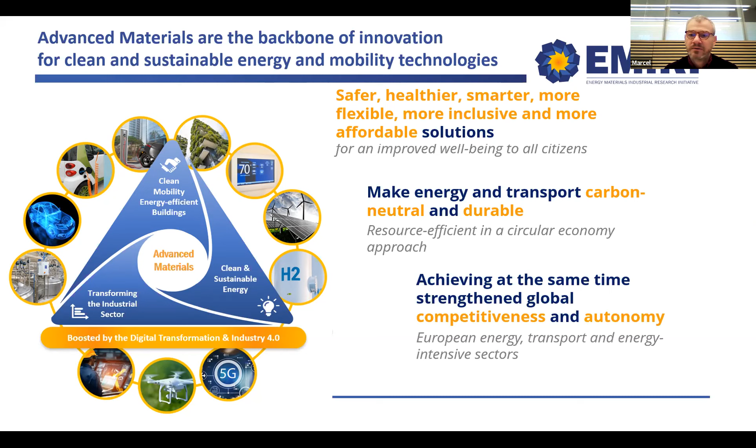I'd say a couple of elements: we are industry driven. There's a majority of research organizations, but they all understand we are here defending research and development or innovation that comes at a moderate to high technology readiness level, I'd say from 3, 4 up to 7 when it comes to EU support. There are other clubs pushing for the more fundamental part, with whom we work, but we try to focus on what we do best, which is industry-driven and industry-supportive research. We try to fit the EU strategy as much as possible, so we try to shape and implement their policies.

For example, EMIRI is one of the leading forces behind the Advanced Materials Initiative 2030 of the Commission, which is there to shape the vision for 2030. So this is typically what we do. On innovation ecosystem, we collaborate with public institutions to make sure that the priorities funded by the European Commission and the member states are the priorities that you guys have. We are there to defend your priorities and to make sure that the money made available is money you can use.

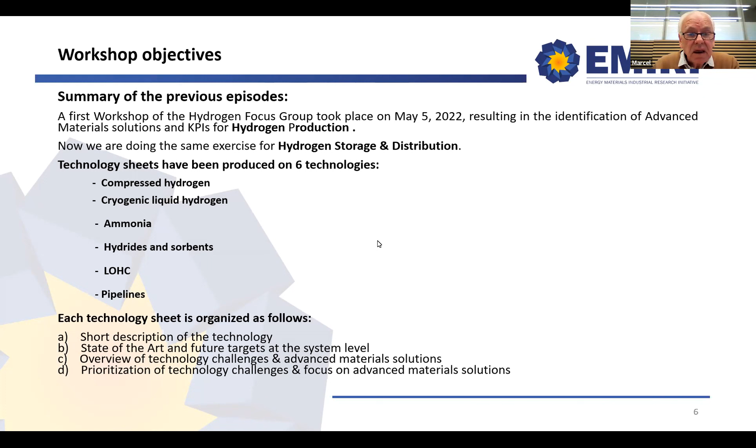Here you see an example of that prioritization work. On the left-hand side, for compressed hydrogen, the different technology challenges: reduce hydrogen embrittlement, increase the storage efficiency, etc. Those challenges have been voted within the focus group, and weight factors have been given to different challenges - you see them from 100 down to 20. And the first series of advanced material solutions has been proposed.

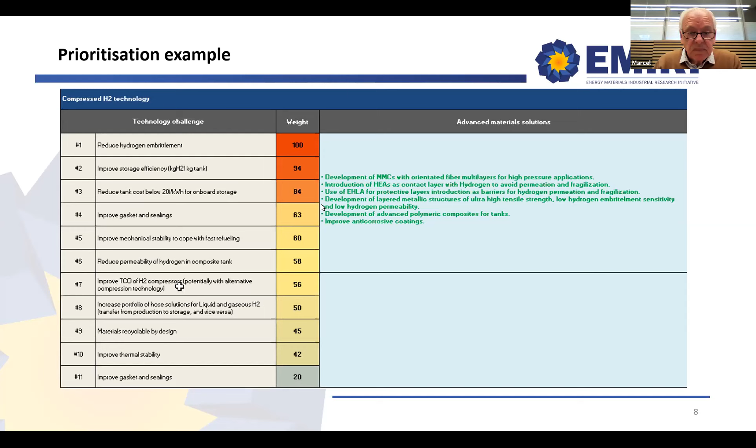So what are we going to do today? In the morning session, open to all of you, we will have experts from different European RTOs and companies give us a technology update on those 6 different technologies. In the afternoon session, restricted to EMIRI members, we will have a workshop aiming to identify the most promising advanced material solutions, KPIs, for those technologies, and a review of the technologies. We will, for those technology sheets, first identify per technology the advanced material KPIs most impactful for the system KPIs, and then select a top 10 of these advanced material KPIs.

We will try to put values on those KPIs - state of the art and future targets, short-term and mid-term. The final purpose being to build a qualitative matrix showing the relationship and impact between the advanced material KPIs and the system KPIs, and that's what we call a heat map.

This is an example of that heat map. You see the different KPIs on advanced materials and their relationship with system KPIs.

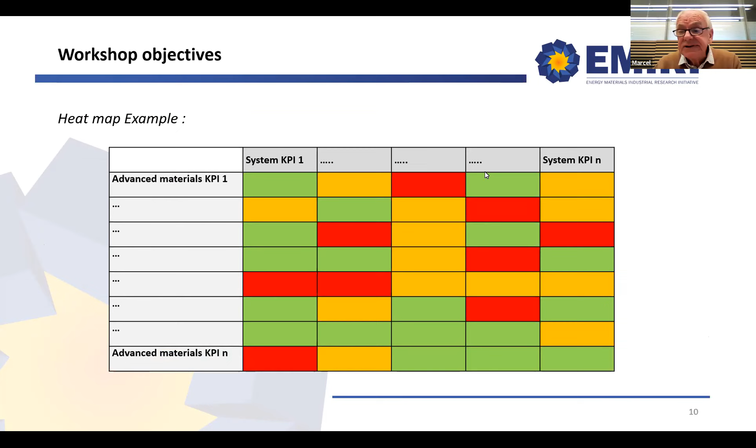After that, the next steps, we will update those technology sheets with the selected key advanced material KPIs, including the values, and we will try to make a heat map with the links between advanced material and system KPIs.

This is the program for today. We will have in the morning session an update on EMIRI. Yeah, that's what we're doing now.

The next item will be a presentation on compressed hydrogen storage, and I will do that myself as an introduction. Then we will have a presentation on liquid hydrogen storage by Dr. Davide Duri from CEA. We will have next a presentation on ammonia

by Professor Earl Goetheer from TNO, followed by a short coffee break to continue by 11:30 with a presentation by Dr. Felix Heubner from Fraunhofer on hydrides and sorbents.

On liquid organic hydrogen carriers. And finally, with Professor Depover from the University of Ghent, a presentation on pipelines. Karim, member of our group, will try to make a short wrap-up at the end of the morning session. That's for the morning part.

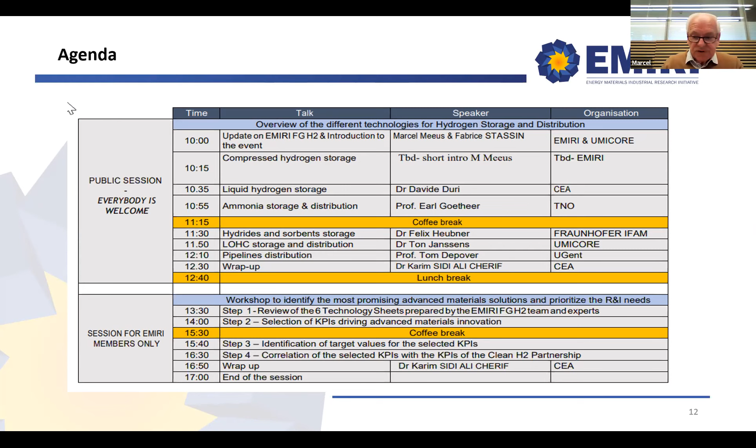And then, again, if time allows for it, a first version of the heat map. So these are the presenters: myself, Davide Duri, Earl Goetheer, Felix Heubner, Ton Janssens, and Depover.

A few words on our focus group. We are about 80 members with good industrial presence. You see here the names: Solvay, UMICORE, Engie, etc.

And a series of well-known research and technology organizations. So we are about 80 members.

The focus group is led by Fabrice Stassin, with as co-leader Karim Sidi Ali Cherif, and I'm doing a little bit of technical work, the technical advisor to those two gentlemen.

Karim did production in May. Fuel cells is announced for January by Fabrice, and today we are doing the storage thing.

The purpose is to define smart key performance indicators, smart meaning specific ones, measurable ones, attainable ones, so realistic ones, relevant ones, and time-based ones. And that's what we will do in the afternoon.

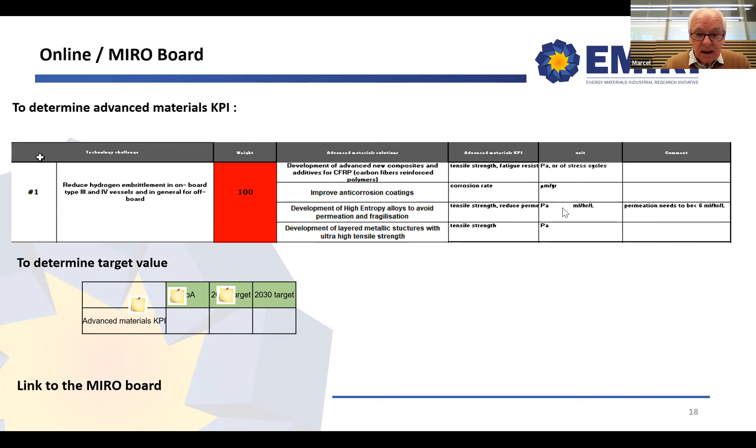But the word will be with you in the afternoon to complete the full picture. Here again, the heat map example, and that was the introduction. Thank you.

Are there any questions on this introduction? If not, we go to the presentations.

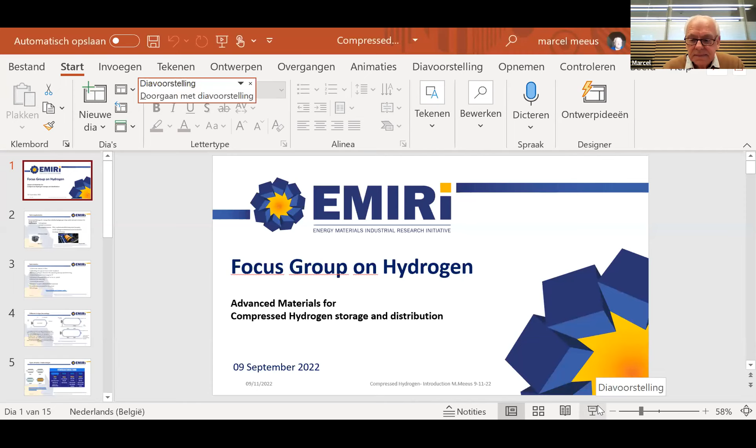So I'm the one to start the series of presentations, and I will give you not an academic introduction, but a more practical introduction on compressed hydrogen storage and distribution by focusing on the tank materials.

So what are the tank requirements in compressed hydrogen storage? It is a technology whereby hydrogen gas is kept under pressure to increase the storage density. And what are the specific requirements to compressed tank storage?

That is, and importantly, the leak tightness of the system. The system has to be compact in construction, needs to have an adequate weight for the application, and more importantly, a high fatigue resistance, meaning that the tank has to be filled, emptied, refilled many times, 10,000, 11,000 times. So we're talking about the number of cycles in the operation of the tank.

And then it will come as a red line through the presentation, bringing solutions for the risk of hydrogen embrittlement. They need to be considered in the design of the tank.

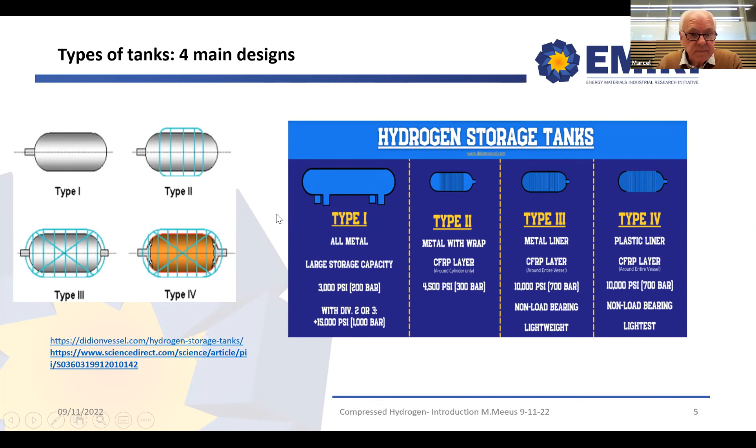In a little bit more detail, type 1 are all metal vessels that store only about 1% of hydrogen at 200, 300 bar. Type 2 is a metal hoop-wrapped composite cylinder, weighing less than type 1. As said before, types 1 and 2 vessels are unsuitable for vehicle applications due to their lower hydrogen storage density, heavier weight, and, because we are talking about metal containers, because of the risk for hydrogen embrittlement.

Type 3 and 4 are the ones for integration in fuel cell cars. Type 3 comprises the fully wrapped composite cylinder with a metal liner, and that metal liner is mostly made of aluminum alloys. Type 4 is the same wrapped composite cylinder, but this time with a plastic liner. That plastic liner is typically high-density polyethylene, acting as the hydrogen permeation barrier. The composite overwrap serves as the load-bearing structure and is typically made of carbon fiber or glass fiber composite, in an epoxy matrix.

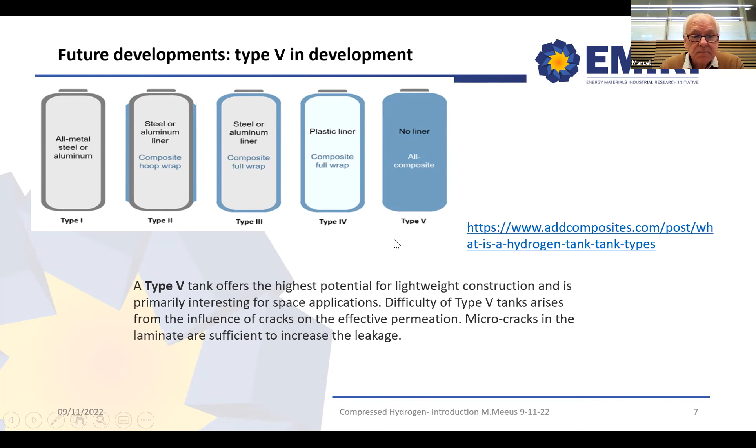So we arrive at EMIRI's advanced materials. What are the advanced materials used in compressed hydrogen storage in types 3 and 4? The metal liners being steel, but mostly or generally aluminum alloys. The plastic liners as the barrier being high density polyethylene or aliphatic polyamides. For the outer wrap, fiber reinforced thermoplastics, and that can be carbon PEEK, polyether ether ketones, or carbon PA6, that's a nylon composition, nylon 6, and carbon PPS, that's polyphenylene sulfide.

So these are the different reinforced thermoplastics wrap materials. There are also thermoset-based composites, glass fibers, and basalt fibers.

When talking about storage of compressed hydrogen, safety testing is of utmost importance, and all types of vessels should be designed, manufactured, and tested in relevant codes and standards. There is a lot of testing possible with compressed hydrogen tanks. I give here simply a few examples.

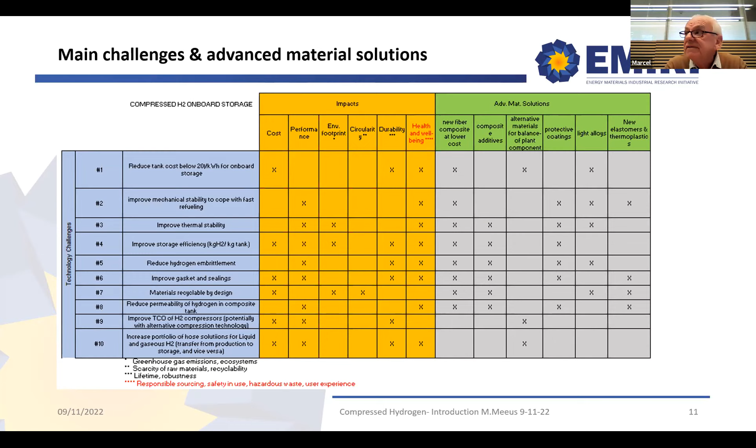As said before, in previous work in the focus group for compressed hydrogen, we defined with about 80 experts a list of challenges on tank cost, mechanical stability, thermal stability, storage efficiency, hydrogen embrittlement, etc. We discussed their impact, and we came up with a first series of new advanced material solutions.

That will be completed in the afternoon with the EMIRI people and specialists working on this specific item. Let me end this presentation by showing you that Europe already has a strong value chain in compressed hydrogen storage. We have an impressive list of producers of tanks for compressed hydrogen already. You see the names that you know: Air Liquide, Linde, Praxair, McPhy, Plastic Omnium, etc. It's a non-exhaustive list — so many people are already producers in Europe of compressed hydrogen tanks.

There are already quite a lot of companies supplying materials to those manufacturers: the carbon fibers, the polymers for the outer layer. We have several companies already supplying composite materials, Cevotec, V-Carbon, Voith, etc. And for the liner material, the inner one, be it high density polyethylene or polyamide, we have Solvay, Arkema, Nov, DSM, etc. Several companies are already excellently doing the job for this sector.

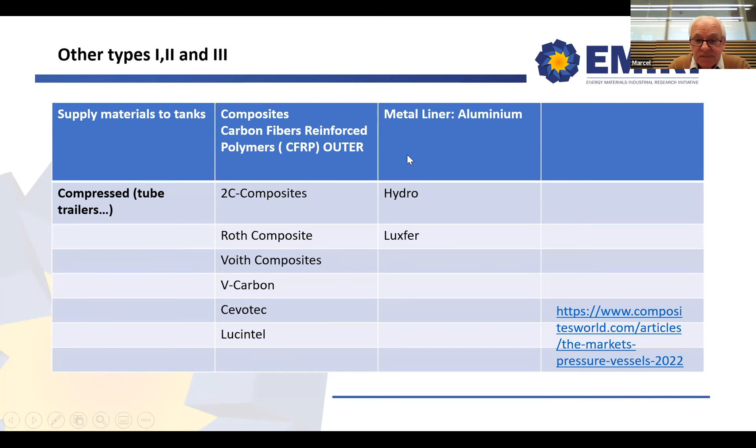For types 1, 2, and 3, for the composites, we have the same names, and metal liner companies, for instance, are Hydro and Luxfer. That's the introduction. Thank you very much for compressed hydrogen. I don't know if there are questions.

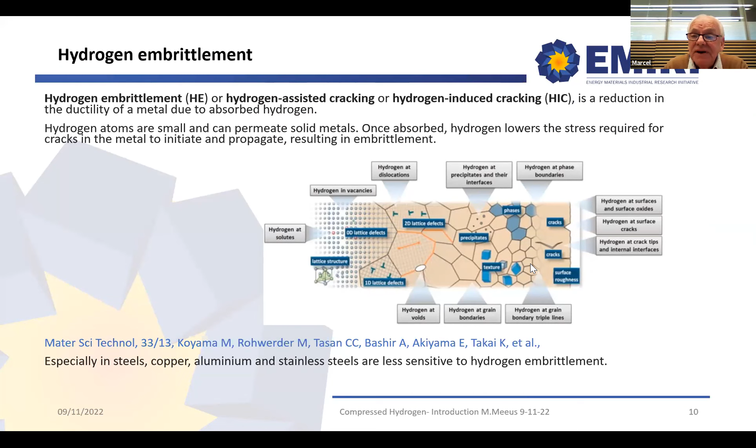There's one you can see in the chat. Yes, I would have a question about the safety check in a fire — how do you actually vent a bottle of hydrogen if there is a fire around? What do you do with the safety valve, and how do you actually conduct the hydrogen away from the critical places? That is a question to be asked to the producers, but I believe the gas is vented through the pressure relief system, and that is what they are testing.

Maya, you have a question. Yes, I would like to know what you think could be the best way to avoid the hydrogen embrittlement — by coatings, protection, or how are you suggesting? The embrittlement is in fact governed by the liner used, and the embrittlement is less present in the aluminum liner because aluminum is less sensitive to embrittlement, and it is also less present with the polymer liner which is used in the type 4 tanks.

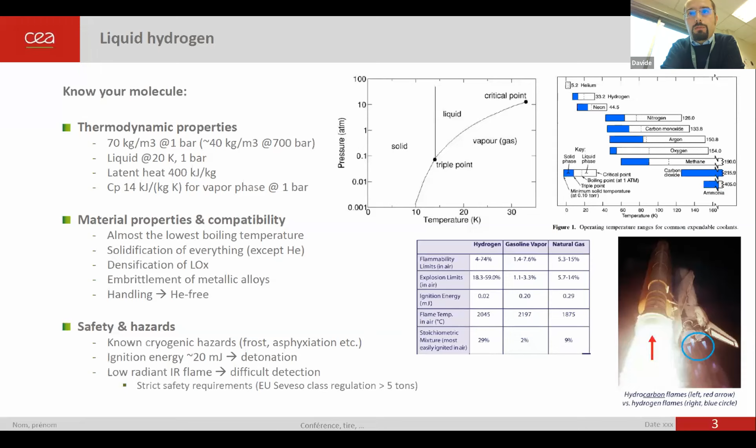So there are strict safety regulations that are right now involved when dealing with hydrogen. Basically, for storage capacity above 5 tons in Europe, we have to deal with the Seveso class regulation, which imposes very strict control and barriers and regulation on the use and handling of this liquid.

So the requirement of what material can be used for a tank is of course driven by the user. I've classified two major classes: ground installation for storage for larger, heavy users with storage capacity larger than 10 tons - it's an order of magnitude, of course, I don't pretend to be exhaustive in this analysis - and then mobile users, which can be earthbound, ships, trucks, automotive applications, aircraft, and then of course space-bound systems like rockets and orbital depot and refueling.

Concerning the ground installation, we are dealing with a storage system which should have a lifetime of about 20 years with hundreds or even thousands of loadings. Normally they always maintain a minimum liquid level in order to allow chill down, to maintain the temperature and avoid waste of liquid hydrogen during cool down of the tanks. So there is always a minimum level below which it's not recommended to go. All events of loading and unloading, all the gas, is managed through venting or torches and flares in order to burn it.

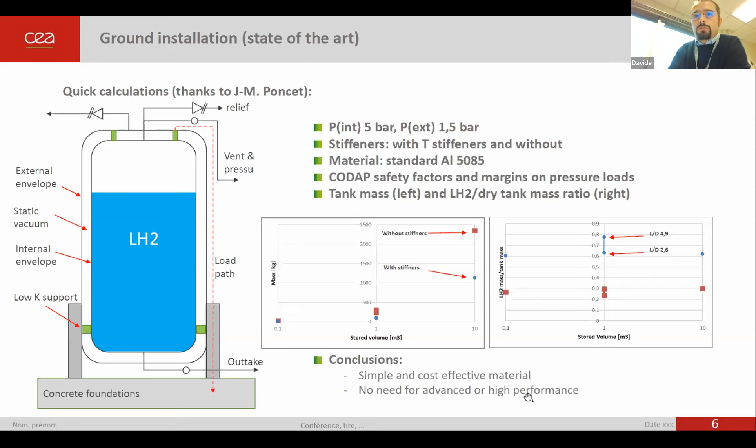Considering all the codes and regulations for pressurized cryogenic systems, we see that right now we are at the state of the art in terms of this structure. So for ground application, the margin of gain is very limited, almost nil.

We don't have to miss the fact that tanks which are normally cryogenic tanks for liquid storage are in a niche market for heavy users, must be built at a production rate compatible with the automotive industry. This is a challenge per se, because we have to build these tanks with the right quality in terms of safety and thermal properties, but at the right production rate.

So the classical solutions that exist are vacuum insulated tanks, for example developed by Linde, with a cylindrical shape, or even more conformal shapes, due to the fact that we are working at relatively low pressures in order to fit within a car or truck. So the boil off, once more, shall be minimized to deal with safety issues, the constant release of hydrogen, and the autonomy for the truck.

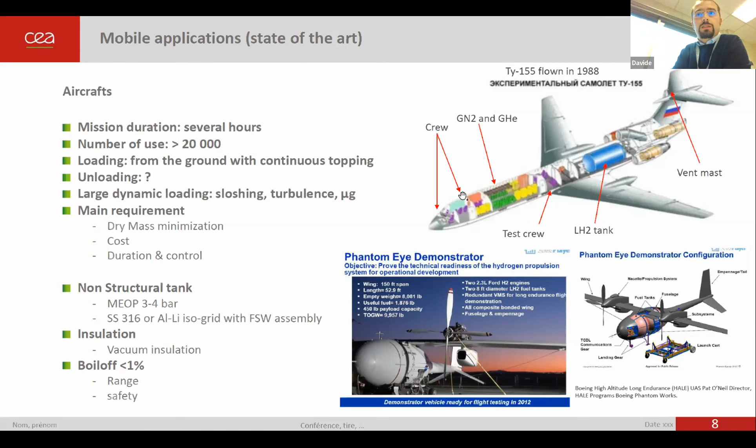And then at the end of the spectrum, where all the development in terms of advanced materials is carried out, is the space, the rocket system application.

So, we will see that all the developments are carried out in terms of use of composites, CFRP, with or without liner, in order to minimize the dry mass in a rocket launcher, but the mission duration is very limited in terms of time, from 30 minutes to 5 hours. There is just one use, limited reuse especially for an upper stage, and even the boil off specification is reduced.

Because once more we are dealing with mission requirements, with mission duration that is very short in terms of life cycles. So normally people work with metallic structures, aluminum-lithium, with simple insulation, glued sprayed foam from the external surface. There is no vacuum insulation with double wall vacuum insulation, and the boil off can be higher than 1% or even 2 or 3%, as we are constantly filling the tanks of the launcher up to liftoff, and then the mission duration is such that there is no issue related to this boil off.

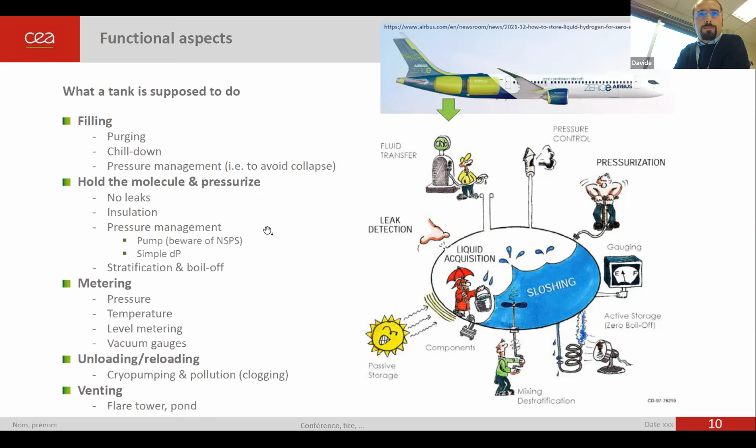Then we have to deal also with safety aspects when bad stuff happens. We can have the classical scenario of loss of vacuum, which means we have to be very careful in the safety relief valves sizing.

Normally, for standard applications, these valves are close to the tank, but for automotive or even aircraft application, we can imagine having very long pipes to evacuate the hydrogen in a different place, so we can have several meters of piping, and this must be taken into account.

We can have spillage and therefore ignition and collapse. The collapse is something that is very typical of cryogenic tanks when we do not manage properly the filling phase. We can have the collapse of the ullage, the vapor.

Like in this example, it can be condensed suddenly, and therefore the pressure inside the tank will be reduced with respect to the environment pressure, and we will have the buckling of the structure. Of course, we have a hydrogen embrittlement issue and a fatigue cycle associated with the loading and unloading.

When dealing also with liquid hydrogen, we have the BLEVE risk, the fact that if we have a bonfire we can have the rupture of the tank and sudden vaporization. We can have a lightning strike, so we have to very carefully insulate the material, and then ground accidents, whatever can happen.

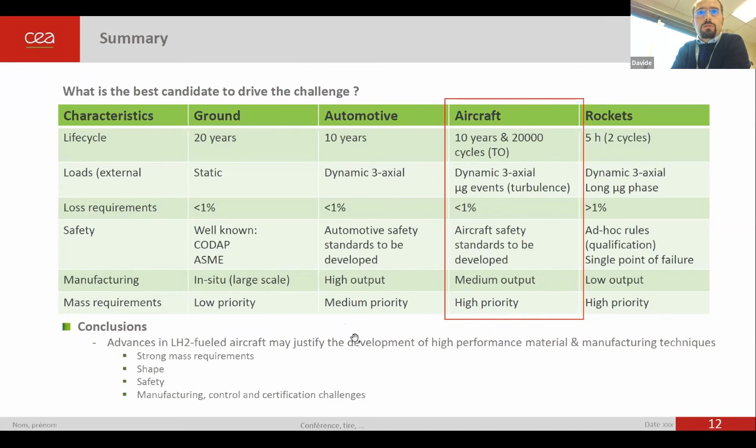So what we are looking for is to have tanks with materials or advanced materials capable of minimizing the dry mass. That's the first driver: low density and high strength, and of course good thermal performance at low temperature in order to minimize heat transfer.

A good mechanical stability is needed. We have to deal with thermomechanical stresses induced by variation from 300 Kelvin ambient temperature down to 20 Kelvin, which means the expansion mismatch shall be minimized in order to avoid cracks and delamination. We also have to be resilient to defects.

Chemical compatibility is not that much of an issue in terms of hydrogen with respect to the surface of the tank, but we can have condensation issues, liquid nitrogen or liquid oxygen condensation on the other side.

And of course, in terms of application, we cannot have a single event leading to a catastrophic failure and loss of life for an aircraft.

Not to be forgotten, when we are looking at using hydrogen, we are storing it in volumes which have a more cylindrical shape. These volumes cannot normally be put inside the wings, so we are also losing something: the damping of the wings associated to load fluctuation. That's something that has to be taken into account.

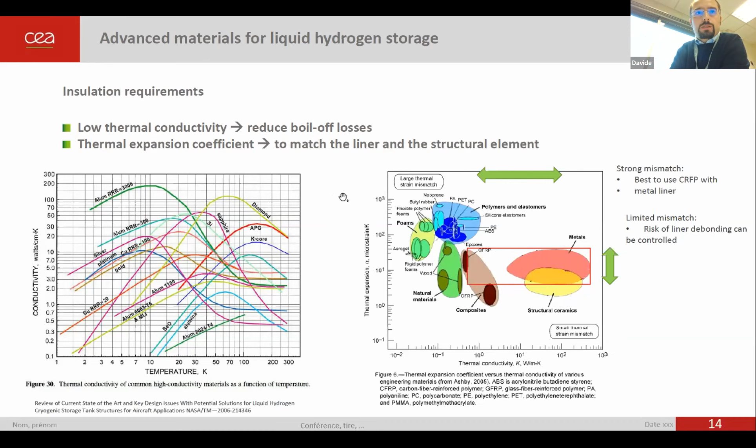We also have to look for high strength and low density. It's a criteria that is difficult to meet. Normally, alas, the best materials in terms of strength are also the ones that have a large density. So we have to deal with this.

And also we have to look at the behavior under failure, because we have to be capable of mastering the propagation of failures, especially in an aircraft system. Fracture toughness and deformation behavior matter too. We have to look at how the structure will collapse in order to identify any failure mode before it occurs, so as to safely dispose of the hydrogen inside the tanks.

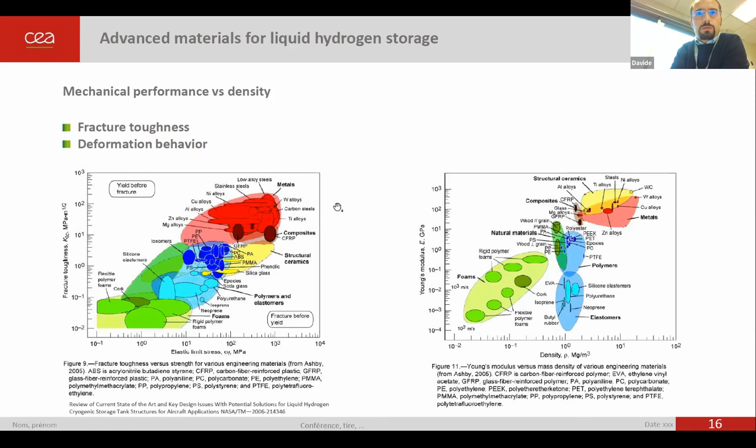So to complete very briefly, there are examples of cryogenic tanks manufactured and tested with advanced materials. The first example, from 1999 to the beginning of 2000, is the Lockheed Martin tank. They went for CFRP liquid hydrogen tanks for a single stage to orbit launcher.

Alas, they maximized all the complexity. Basically, they went directly for a liquid hydrogen tank with a multi-lobe structure and a load-bearing structure. The tank had to sustain all the launch load with a shape which is not cylindrical, with no liner and a simple CFRP.

And of course they had a huge delamination of the cores due to cracking. The fact that there was no liner led to micro cracks, which led to the accumulation of liquid hydrogen within the structure of the CFRP panel. Then due to heating, the pressure within the panel increased, and basically the structure of the tank exploded. So that's the first example.

Can you conclude in 2 minutes? Yeah, of course, I'm almost there.

More recent applications are once more linerless applications flown in 1996, and right now the state of the art, not yet flown, is the use of a carbon composite structure with different laminations in order to reduce permeability. They do not want to put a liner on it, but once more, these are rocket applications in which permeation is not an issue.

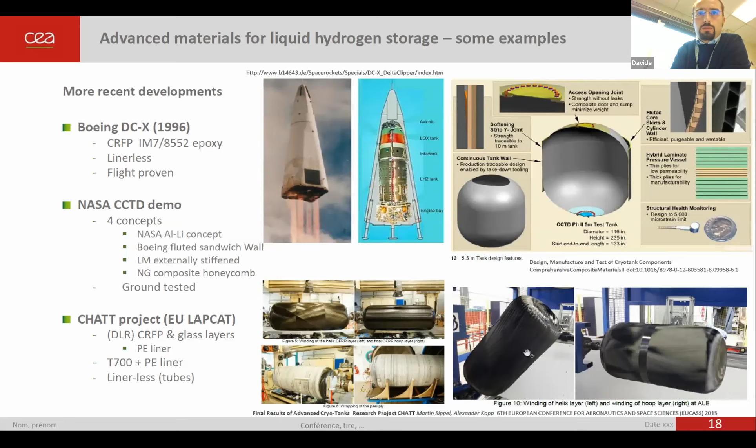In Europe, the most advanced activities are driven by the European LAPCAT collaboration with DLR and other institutions, in which they develop more common tanks. And I reach basically the conclusion that there has been quite a lot of activity carried out in the past and even right now.

We can demonstrate a reduction using advanced materials by almost 30% in the tank structure, which is a good thing, especially for aircraft application. But the fact that we are developing this technology for rocket means that we cannot directly use it for airplane application, or downgrade it to, let's say, automotive application for liquid hydrogen.

So the path forward that we can foresee and encourage is to separate the different functions, to minimize the risk in terms of using the right material, let's say composite or advanced material, for non-loaded structure with warmer temperature, and then to use more standard approaches, for example, for when the cryogenic hydrogen is to be used.

The challenges, and with this will be my conclusion, are first of all the manufacturing and the cost associated with it. The design policy is quite complex to design such a system because the margin policy and certification requirements are not known, and testing will be quite a huge challenge because we have to be able to test such a system under realistic conditional loads, represented from handling, flight, and also abnormal operation.

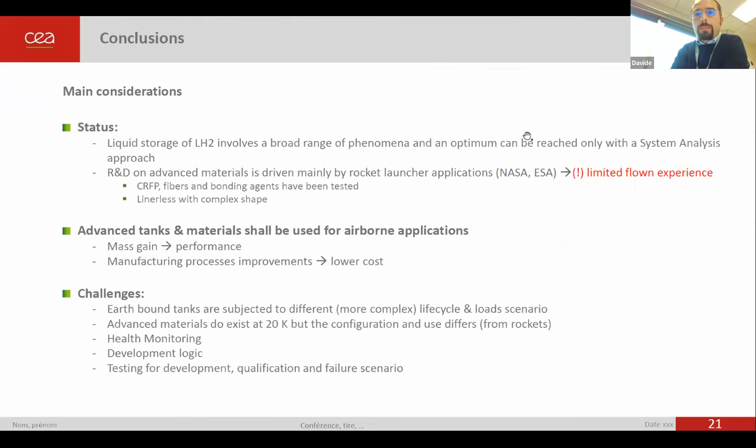Thank you to all, and if you have any question, I will gladly answer to all of you.

Thank you so much, Davide. It was a very dense overview. It's very helpful and very rich. I did not see any hands raised, and I did not see any questions in the chat, but you have an opportunity, all of you, to ask questions now. I think we can take one question because of the time, and if there are questions that pop up later, you can still send them to us and we will give them to Davide. One question.

I think that you said too much, so it's very clear now. But you have a question. Yes, Davide, this is Karim speaking. So I have a question.

So I understand that the main advanced material solution is for aircraft applications, right? And we see the same tendency, as we are in compressed hydrogen storage, to go towards composite materials, right, with development. Do you see any common development from the compressed hydrogen storage world that can help the liquid hydrogen storage developments?

So the next 20 minutes, 15 to 20 minutes, I'm going to talk to you about ammonia transport and storage. First, a couple of words about who is talking. My name is Earl Goetheer. I'm working as CTO at a venture building company called Hydride XL, but I just started last week - this was the start of my new career.

But before, I worked as a principal scientist at TNO, which is the largest research organization in the Netherlands, and I was responsible for the main process technology. Next to my role as CTO, I'm also a professor at the Technical University of Delft, at the Faculty of Mechanical Engineering. So with this, let's go into the field of ammonia.

Before going to the future, I will always like to go a little bit back to the past, because ammonia has a big history, and without ammonia, we will not be with this moment in time 48 participants. Perhaps only half of the participants would be here, because we need it as a fertilizer, and without the fertilizers we can't sustain 7 billion people on this globe.

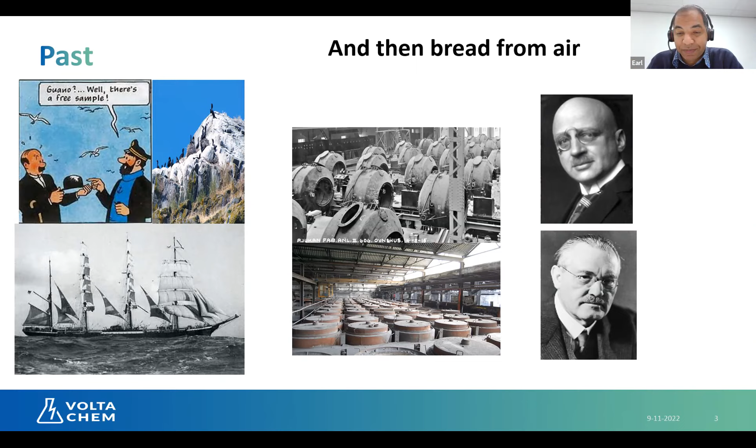So that's the past, and at this moment in time we are well above 170 million tons of ammonia, making it one of the biggest commodity chemicals we have. But it's also responsible for a huge amount of CO2 - a little bit not so nice, because we really need ammonia to feed 7 billion people, but the consequence is a significant amount of CO2 going into the air.

Now, where are we with the current Haber-Bosch processes? They tend to be extremely large, with total efficiency around 60-65%. A scale of 1,500 tons per day is typical, and it could be even larger. So this is really large-scale processing, and it also means there's a complete transport infrastructure to move ammonia all over the globe.

At this moment in time in Europe, because of the high natural gas prices, a lot of our ammonia plants are out or even turned down. That has some consequences.

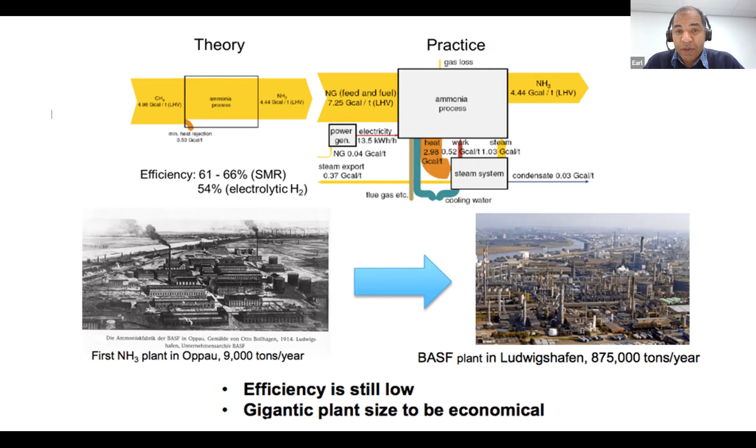If you look at a molecule like ammonia, often people say that is dangerous, we have to be careful about it. Yeah, ammonia is a health hazard - if the concentrations are too high, above 5,000 ppm, you basically suffocate within minutes. But there's one major advantage of a molecule like ammonia: you really smell it at very low concentrations. Already at 50 ppm people smell it, and because you smell it, you can take action like running away.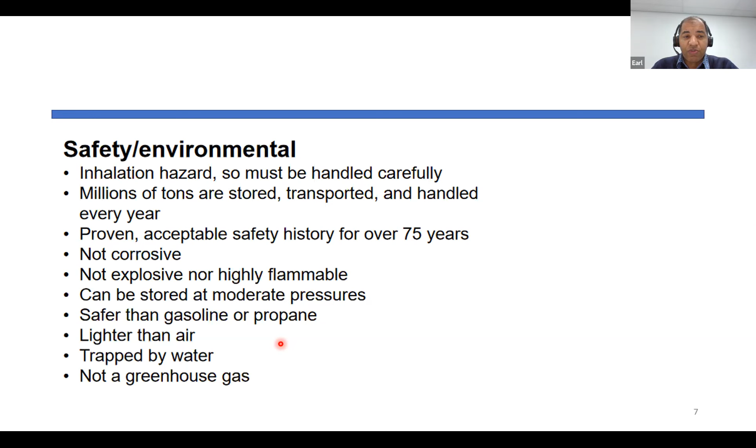Now, the thing is what is really different now is that we're going into the energy transition.

Basically, as a chemical engineer, I often say that the world which I know, which I've been trained in, is going to change dramatically. If you go to Antwerp or Ludwigshafen or Rotterdam, with the beautiful refineries and the ammonia plants, they will change dramatically because we want to do things now with renewable energy. And that has a consequence for our ammonia demand.

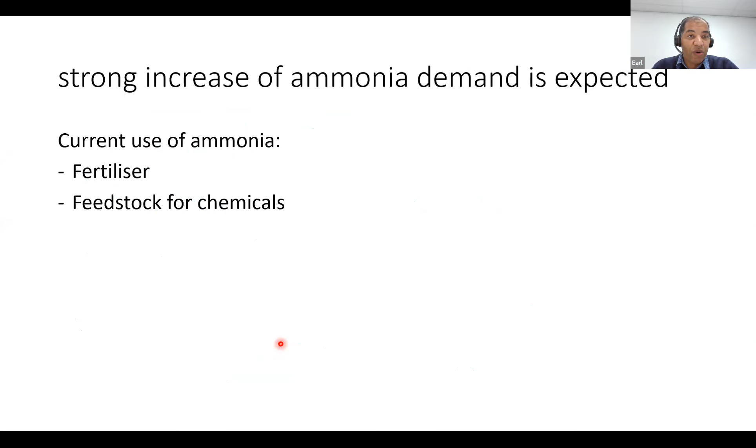Basically, our current use of ammonia is fertilizers and feedstocks for chemicals. But we are going to move to additional things like ammonia as an energy carrier, so transporting energy from location one - for instance, in the Middle East - and transporting it here to the Netherlands and using it directly in a power plant, as an example. You turn it into ammonia, so you go from power to ammonia to power again.

The ammonia is produced in the Middle East, is brought here to Europe, and is cracked back to hydrogen. So then ammonia is a hydrogen carrier. Or another example of a future role of ammonia is that ammonia is used directly as a fuel. Think about not for planes, but for shipping, as an example. That sounds very strange to say, because we are not used to thinking like that.

But the advantage of ammonia is that you basically can produce it everywhere. When you have cheap, abundant renewable electricity available, then you can produce hydrogen from it, and nitrogen - 80% of the air is nitrogen. So you can produce it in principle everywhere. Of course, it comes with a cost.

Now what is key in this development towards the energy transition is that we're going away from gray hydrogen, which is typically made working with methane, or in China with coal, to go to blue hydrogen, and then blue hydrogen can be used for making blue ammonia, and basically then you store your CO2 under the ground. Then you have turquoise hydrogen: basically you take methane, you crack it to carbon and hydrogen, you couple this hydrogen to nitrogen, and you have your turquoise ammonia. And of course you have green hydrogen as well, producing green ammonia.

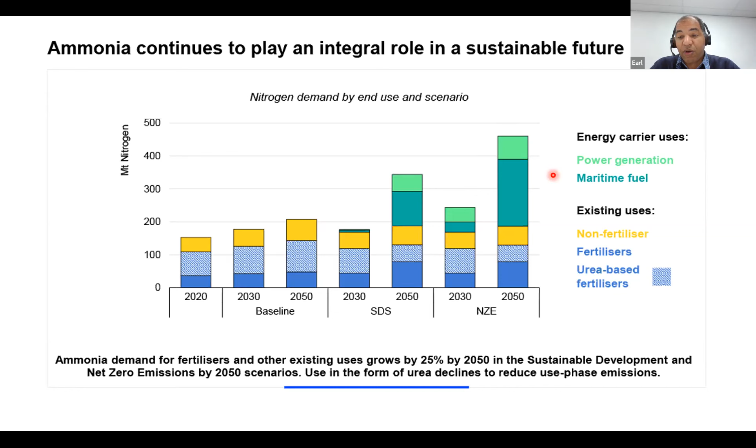So we need to think about the consequence for the whole transport option, because per location things will be different. So as an example, let's look at Europe. This is coming from an IEA study: they predict that in 2050 the majority will be produced here with electrolyzers.

Yeah, that's 2050 - a little too far away for me, but if I just think about the coming 10 years, Europe has said we are going to develop 10 megatons of green hydrogen production in Europe, and 10 megatons of hydrogen will be produced elsewhere and transported to Europe. A significant part of this 10 megatons produced outside Europe will come in the form of ammonia. Now, why is there so much interest in having ammonia instead of hydrogen imported directly?

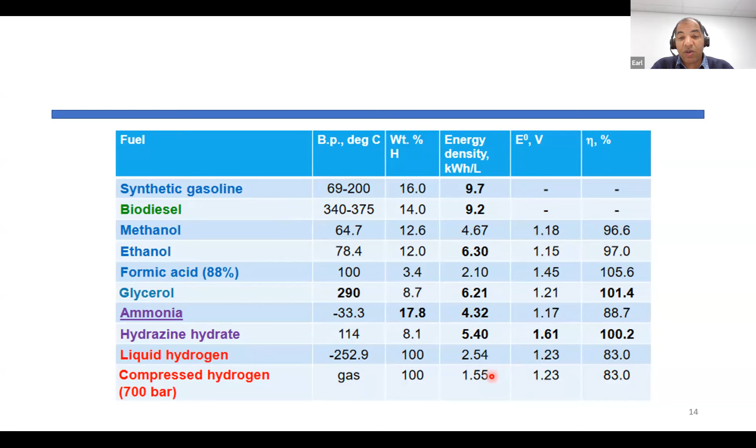It's because if you look at the energy density in kilowatt hours per liter, the energy density of ammonia is significantly higher than, for instance, gaseous hydrogen in the form of compressed hydrogen, or even significantly higher than liquid hydrogen. So it's much easier to transport hydrogen in the form of ammonia, or liquid organic hydrogen carriers which will come later on, than directly via hydrogen.

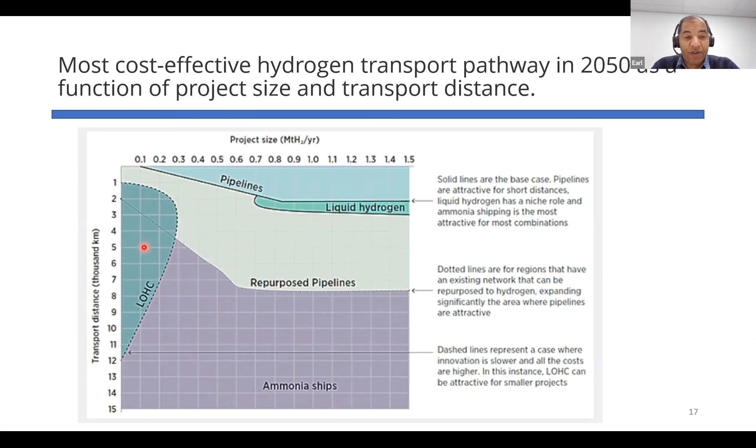Now in general, don't look at the absolute numbers, just the trends. If you want to go for very large volumes and a very large distance, then transport of ammonia via shipping is more preferred than pipelines, liquid hydrogen, or even liquid organic hydrogen carriers. So that's a rule of thumb.

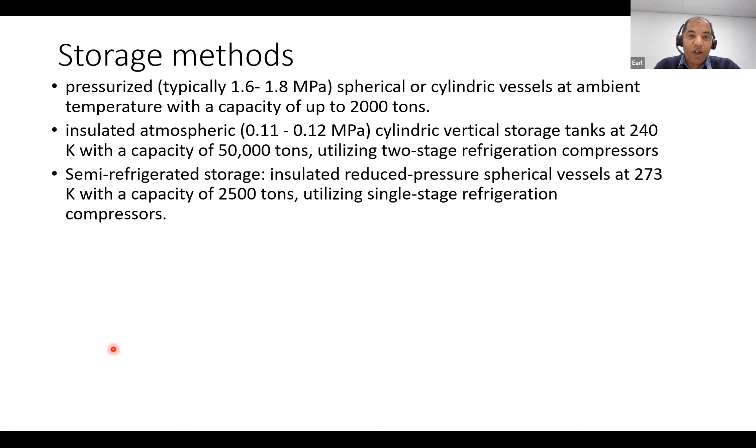So typically around 1 bar storage tanks, which can store up to 50,000 tons in one of these units. But there's another possibility, and that's basically to store it into caverns. There are already 2 examples known, one in the United States and one in Norway, with a scale of 20 to 50 kilotons. I think these are really one-offs, because one of the main issues when you store ammonia in the subsurface is the possible contamination you get when you extract it again from the subsurface. But in principle, you can store it, for instance, in a salt cavern - you can store ammonia the same way as you now store methane or even hydrogen in the subsurface.

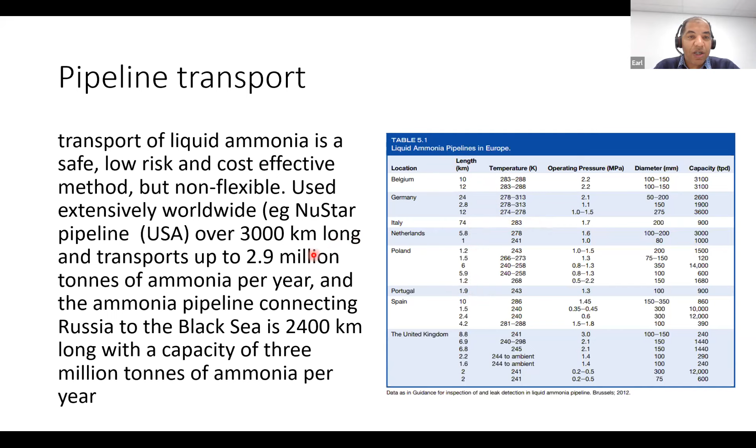Okay, we know how to store it, then we can think about transporting it. Basically 4 modes of transport: pipeline, rail, ship, and truck. If you look at the pipeline, we are already doing this over thousands and thousands of kilometers, not only in the United States and Russia, where they do this already on megaton scale, but even in Europe we have capacities in the Netherlands, for instance, of in total 4 kiloton per day. That's really quite a substantial capacity, so we are already transporting ammonia over quite some distances in the Netherlands. But if you look at typical lengths - 10 kilometers, Italy 74 kilometers - not in the same order of magnitude as in the United States or Russia.

Other possibilities to transport is via railway, typically transported as a liquid at 15, 16 bars. In the United States it's a really very common way of transporting ammonia. But I think the most important for us in our discussion is transporting ammonia via ship. Typically the ships used for ammonia transport are basically the same ships as for LPG, so only minor adjustments are needed, because the conditions are quite similar, to be able to use it in an LPG carrier. Typically the LPG carriers - we're looking at a little smaller scale, so let's say 20 to 60,000 cubic meters.

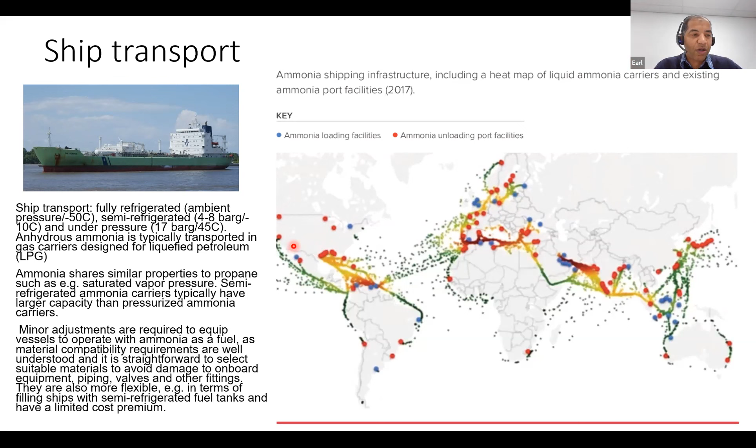All this ammonia will come to certain locations, and now all over Europe you see ammonia terminals in development, where ships can be docked. There's an example in Rotterdam, where ships can dock their ammonia, which can be cracked back to hydrogen, but can also directly supply ammonia in gas phase.

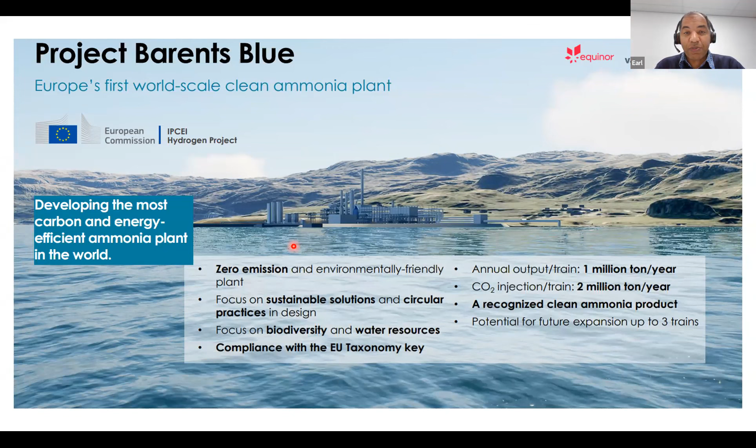These are connected to initiatives like in Norway, where they are producing blue ammonia, with the desire to transport it back to locations like Rotterdam. If you look globally, because of all this interest in ammonia, you see a lot of announcements related to new ammonia terminals.

I hope you've seen that ammonia is really an interesting way of transporting energy. We know how to do it. I personally think, just like this sheikh from Saudi Arabia said, that we are moving to something better - not because we have a lack of oil, but because we also have something cheaper. So that was my talk, and I hope you found it interesting.

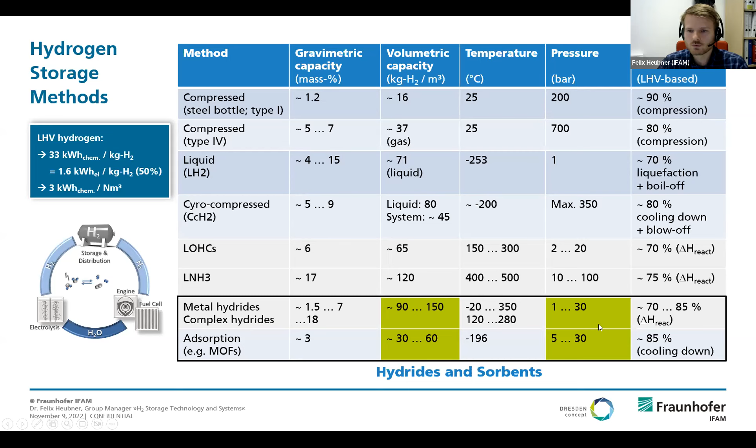The gas pressure for hydride formation is very different for the different hydrides. For metallic hydrides, we often have gas pressures between 1 and 30 bar, for temperature ranges let's say -10 to 100 degrees Celsius. So there's always a relation between temperature and gas pressure, because we have this chemical reaction in the background.

To name one example more specifically, magnesium reacts with hydrogen in the gas phase to form magnesium hydride, as you can see on this slide. The reaction takes place at 300 degrees Celsius, for example, and 5 bar hydrogen gas pressure.

The formation of a metal hydride, in terms of the chemical reaction, is an exothermic reaction, so heat is released during formation of the hydride. When you want to decompose the hydride to release hydrogen to your fuel cell, for example, you have to deliver some heat from the fuel cell. So you have to provide energy from the usage, or the utilization.

Metal hydrides or sorbent storage have the main advantage that hydrogen is bound to the materials. On one hand, it is a very safe storage way, because hydrogen is not only available in the gas phase and can be released during a leakage at once. Hydrogen is bound on the materials, so it's a more safe storage. In combination with the boundary conditions in terms of temperature and gas pressure, it can be even safer, because you have only low gas pressures often available at medium temperature ranges.

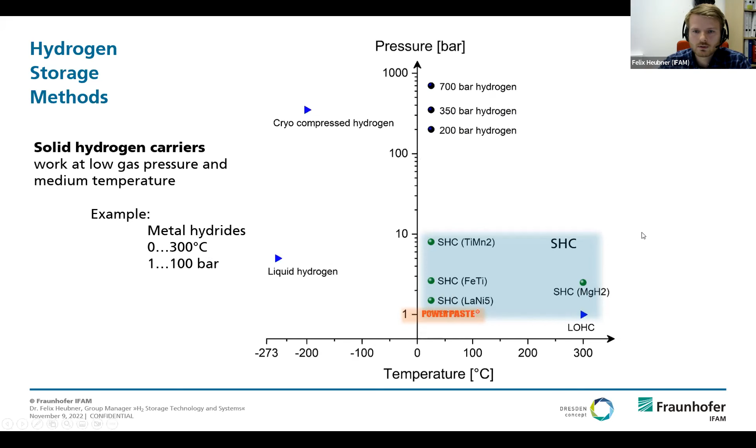The hydride diversity is very huge, so a lot of materials absorb or adsorb hydrogen on the surface. These are just some examples about interstitial hydrides, so metallic hydrides that are very cycle stable, for example, can be cycled a few thousand times. This can be titanium manganese based hydrides like these, or titanium iron based hydrides.

Temperature and gas pressure is always different for the different hydrides, and this is what the graph on the right-hand side shows you - the temperature of operation and the gas pressure for the different materials. We have here one example, titanium manganese-based hydrides. Behind this curve, that's a van't Hoff plot, stands a pressure composition temperature diagram, and there are different values for absorption and desorption available. So we have more like a corridor for each material, not only a straight line.

So this is titanium manganese based. We have some complex hydrides available that have a higher gravimetric storage density, for example, sodium aluminum hydride here, or some magnesium nickel based hydride, or even pure magnesium hydride operating at higher temperatures.

The metal hydride family often has a very high volumetric storage density, but you always need the host metal to carry the hydrides. This means that the gravimetric storage density is sometimes low, so these conventional interstitial hydrides are not used for mobile applications. They are more used for stationary applications, and there's a lot of research going on in the field of complex hydrides.

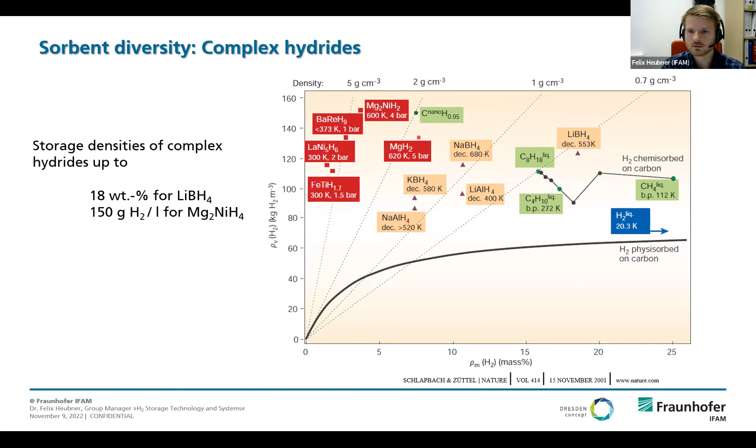In terms of applications and commercial operations of these hydrogen carriers in the past years, there's a popular example coming from a German company: ThyssenKrupp Marine Systems. A German submarine runs with a fuel cell and metal hydride storage on board. ThyssenKrupp uses the fact that desorption of hydrogen is endothermic, while heat is released from the fuel cell, so you can use the metal hydride storage as a heat sink for this marine application.

Interstitial hydrides are also used for materials handling devices, for example from GKN, for a stationary storage system, and there are smaller mobile applications like scooters, published a few months ago. You can use hydrides not only for storage but also for compression, because of the relation between temperature and gas pressure, which is very interesting. So you can build thermochemical compression systems for hydrogen using hydrides.

Again, combining this thought about reaction enthalpy: absorption is exothermic, desorption is endothermic. You always need a heat source available for a hydride application, so every material needs to be integrated into an energy system because you need waste heat. Here's one example, a schematic drawing of a fuel cell in operation on the left-hand side, fueled from a hydride storage. Heat needs to be transferred to the hydride storage to release hydrogen again, so it's possible to integrate about one third of the exhaust heat of a fuel cell to the hydride storage to release hydrogen.

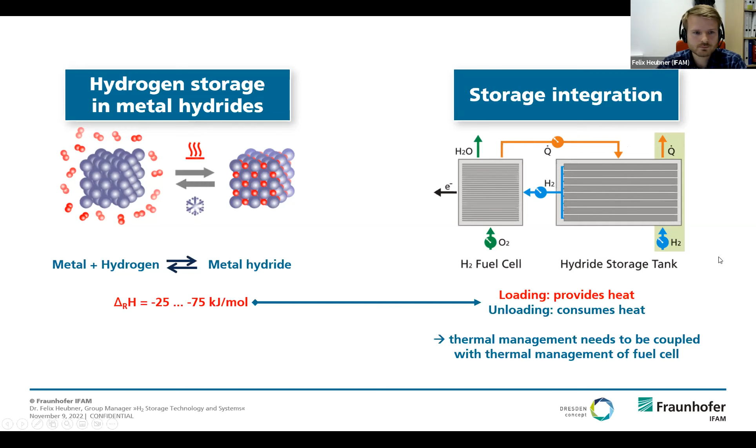To sum up the advantages of the materials: you have a very high volumetric storage capacity, in theory up to 150 grams hydrogen per liter, and a low working gas pressure at the same time. Hydrogen is bound to the materials, so you have high safety with these materials.

There are some disadvantages too. Of course, you have a low gravimetric hydrogen storage capacity because you need the host material first. The thermal conductivity is often limited for metallic or powdery materials because of small particle sizes, so dynamic operation is limited. And you have volume expansion of the materials during hydrogen uptake.

I want to show you this radiograph sequence of a granule of 1 centimeter diameter as it absorbs hydrogen. Now it has already absorbed hydrogen in a few seconds. From this granule results a powder bed after only one cycle, because this was a very brittle material, titanium manganese based. After one cycle, we had fragments between 100 micrometers and 1.5 millimeters.

This is something that needs to be taken into account when designing a storage system based on hydrides: slow thermal conductivity, volume expansion, decrepitation upon cycling - these particles becoming finer and finer during cycling. These are terms that have been elaborated in R&D projects over the last years.

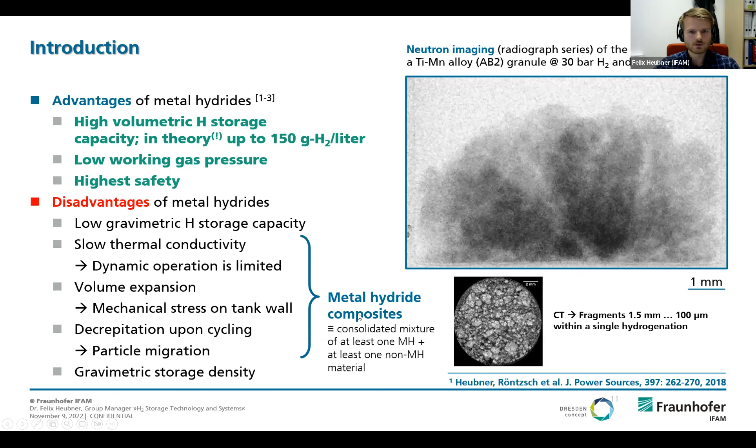One solution is using metal hydride composite materials. I will skip this slide here. The composite materials use the basis that it's possible to add to a metallic powder, or a powder that is able to absorb hydrogen, a second phase needed to increase the thermal conductivity of the powdery material.

So both materials are mixed, blended together, and compacted afterwards in a uniaxial press into a tablet. These tablets have increased thermal conductivity of, let's say, 5 to 100 watts per meter-Kelvin, and reduced porosity of the powder as well. So it's easier to integrate these tablets into tube bundle reactors made to store hydrogen.

The tablets, when we look at the cross section of these materials, have an anisotropic thermal conductivity, because the materials inside sometimes align in radial direction. That's nice for heat transport in the radial direction toward the outer wall of the pressure vessel.

So how to integrate these materials? When we have tablets, we can think of some kind of cylindrical design for a storage vessel, which can be a tube bundle reactor as well - easy scaling by paralleling one pipe with following pipes. Inside this storage vessel we have the compacted materials with higher thermal conductivity, and there's some free volume reserved for the volume expansion of the materials. So always take into account heat management inside the materials bed, transporting heat to the place of reaction and releasing heat when it's needed.

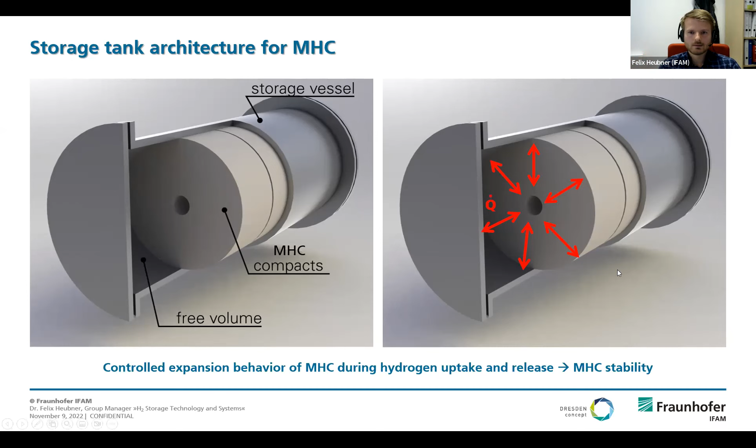This is how it could look in prototypes - a very simple tube bundle design. The pipes are made of 316L, a good chromium-nickel austenitic stainless steel used for the storage system. Maximum pressure was about 30 bar hydrogen gas pressure. It was made to operate next to a stationary PEM fuel cell, using exhaust heat from the open cathodic fuel cell system, integrated afterwards over the outer walls of the pressure vessels.

These composite materials are made in uniaxial presses known in the powder metallurgic industry for several years. They were used in the past for producing gear parts, for example—one very famous example. So this machinery can be used for producing composite materials for hydrogen storage as well.

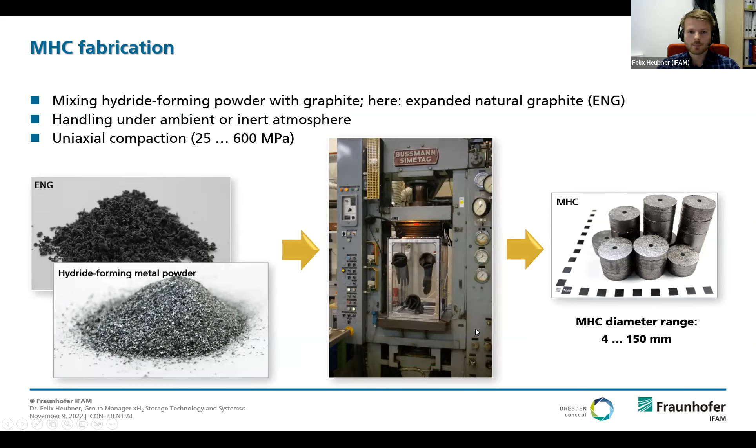The desorption is then at constant temperature, triggered again from the gas pressure—only lowering the gas pressure will lead to decomposition of the hydride. We see here the endothermic behavior of the materials, so there's a volume expansion going along with hydrogen uptake and shrinking during desorption. The materials need to be stable during cycling in such a pressure vessel, and that's one example where after, I think, 40 to 50 cycles, the materials remain stable inside.

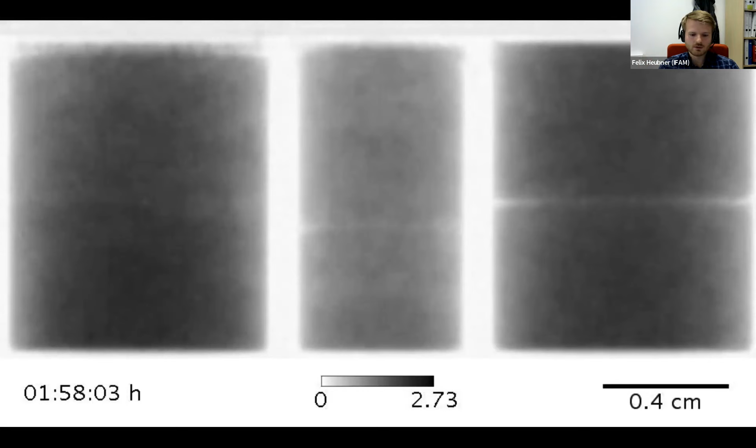R&D in the field of sorbents often starts with evaluating application scenarios, because you need to think of the storage materials together with exhaust heat. It follows with fine-tuning of materials, for example to fine-tune gas pressure and temperature where the hydride formation takes place. This is followed by synthesis and analysis, end-of-life recycling concepts, and integration into energy systems with simulation and modeling, for example, and engineering prototypes, going the whole way around.

To sum up this talk and give some outlook about future perspectives in terms of R&D and materials: a lot of materials absorb or adsorb hydrogen at low gas pressures, but it's very important to understand this chemical reaction—heat needs to be used for desorption of hydrogen, for example. One of the main benefits is the enormous volumetric storage density: up to 95 grams of hydrogen per liter for very common cycle-stable alloys, and can be even higher for complex materials, up to 150 grams of hydrogen per liter—a factor of 3 compared to 700 bar gas storage, for example, on the level of the material.

The reactions are safe because the hydrogen is bound in the materials—to have this link to safety again. R&D is performed these days in terms of cost, because the cost of materials needs to come down. Sometimes there are materials inside for catalyzing the reaction like vanadium, but there are some very low-cost materials available like iron-titanium based alloys, or manganese-based alloys. So it's very important to lower the costs here on a system level.

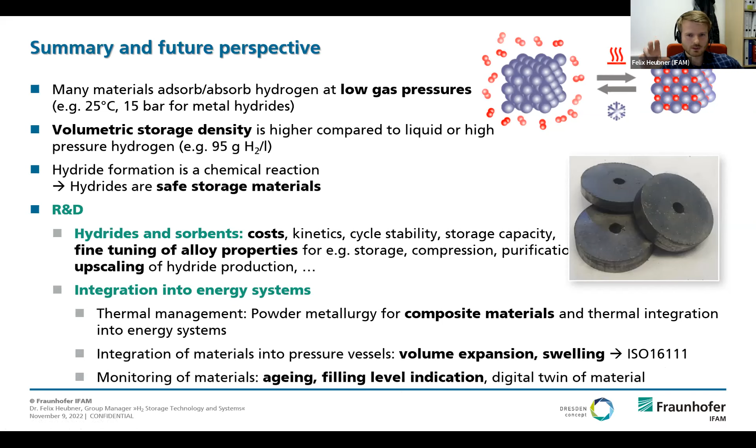A very interesting field of research is aging and filling level indication for monitoring of the materials, because measuring the filling level of sorbents is not so easy. For a gas pressure storage device, you cannot only measure the pressure of the storage system; you have to take into account the temperature as well, and maybe the history of the materials.

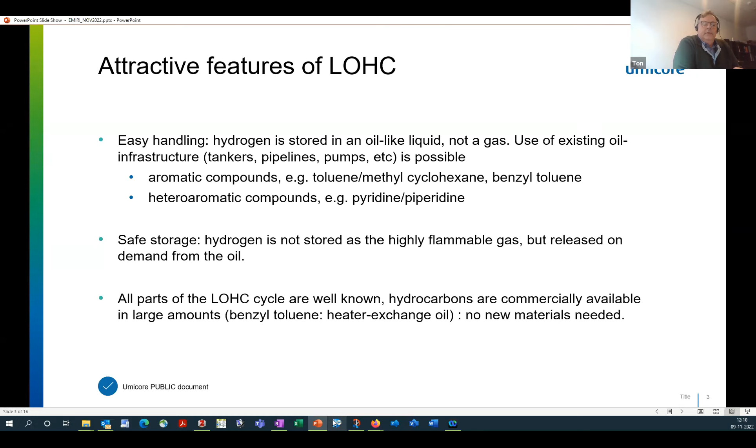We're not quite as high as ammonia. And if you compare to conventional fuels like diesel, we are at least a factor of 2 to 3 lower, and that also goes for ammonia. So that means, as a consequence for transportation, you need to move around larger amounts of this LOHC as compared to diesel. Also for pipelines, the energy density will not be as high as we are used to from oil.

If we compare to hydrogen storage materials, of which we had a nice presentation just before, typical effective hydrogen storage capacity in an LOHC is 4 to 5 weight percent. And the temperature you need to release the hydrogen is typically between 150 to 280 degrees, sometimes a little bit higher, with the pyridines a little bit lower. So we are operating in this box on the graph - comparable to a lot of hydrides, but temperature will always be an issue.

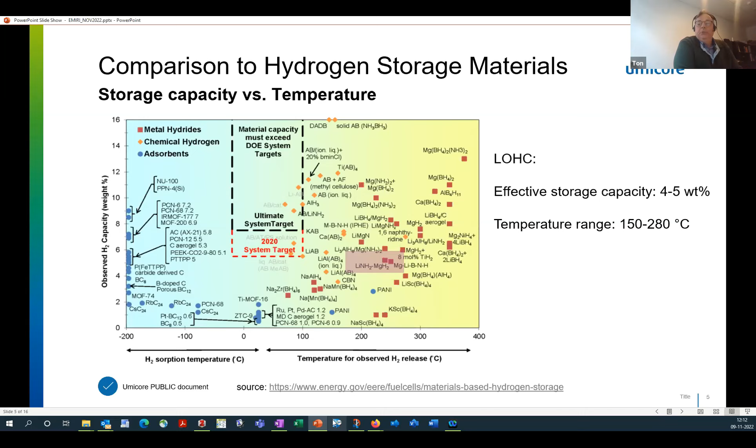So to release the hydrogen, we need a catalyst, and catalysts are actually well known. These are dehydrogenation reactions, and noble metals are supported - noble metals like platinum, palladium, ruthenium, rhodium will work for this reaction.

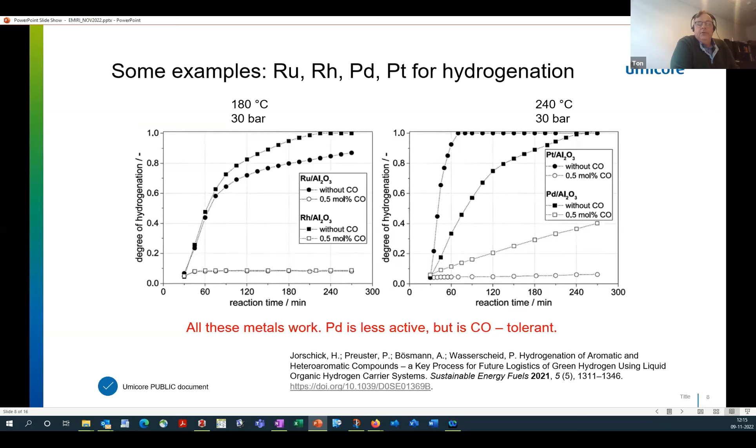So this is a little bit the space we are moving in, dependent on the process conditions that we have - you select a material. Platinum is also good for dehydrogenation. The difference between hydrogenation and dehydrogenation is that dehydrogenation typically takes place at a slightly higher temperature, around 250 degrees, and you lower the pressure. So hydrogenation is running at 20, 30, 40 bar, and dehydrogenation is essentially running at atmospheric pressure, or maybe up to 5 bar. That is how you can tune your LOHC process cycle.

Another point is that to have enough catalyst activity, we want to have small particles. We are actually aiming for particles that are about 2, 3, 4 nanometers in size.

There is another point to be considered, and that is that there may be unwanted side reactions. The reaction is running quite well, the liquid is very stable, but during the reaction you may find that some of the hydrocarbon molecules break, and then they typically will produce heavier molecules, which have a higher boiling point. This is what high boiler formation refers to. And if that happens too much, then your liquid is not stable, it will have a limitation in the application, and you want to prevent that.

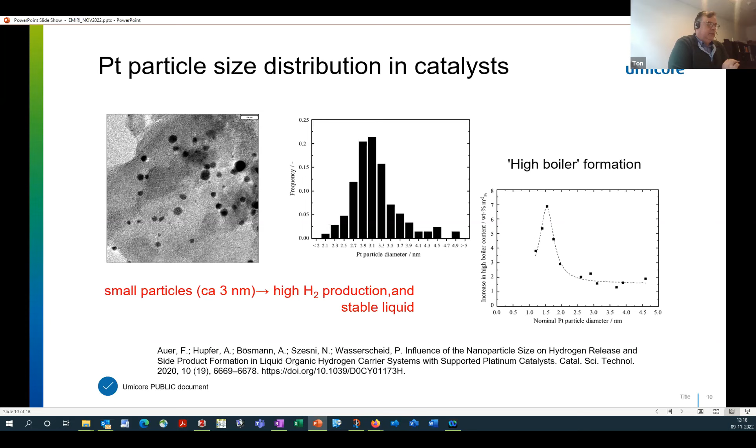In the graph to the right, you see that the high boiler formation is very much dependent on the platinum particle diameter, so this is also something we have to compromise. We want very small particles for the activity, but we don't want the oil to break too much. So for platinum, this turns out to be an optimal particle size of around 3 nanometers on the support.

So far so good, but there is also a problem, and that is the thermodynamics, as already mentioned before. To store the hydrogen in the molecule, we have an energy release of about 65 kilojoule per mole, and to release it again in the application we have to provide this 65 kilojoule per mole. That is 27% of the combustion energy of hydrogen. So it essentially means we lose about 30% of the energy content in the hydrogen we want to use, just to keep that reaction going. This is a major factor that limits the efficiency of the process, and it's also the reason why the useful hydrogen storage capacity is around 4% and not at the theoretical 6.5% or so.

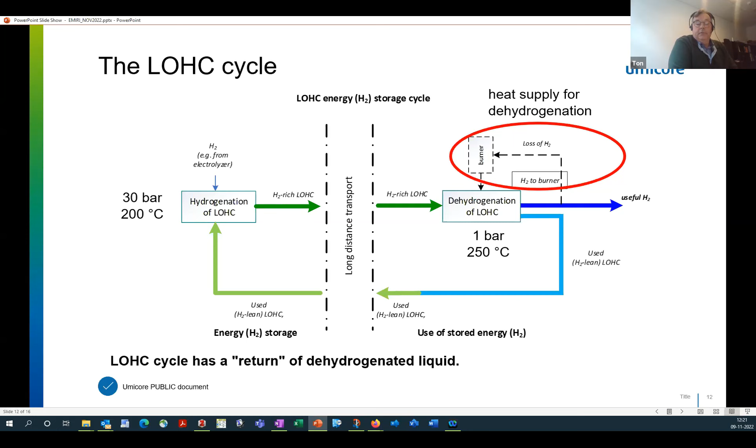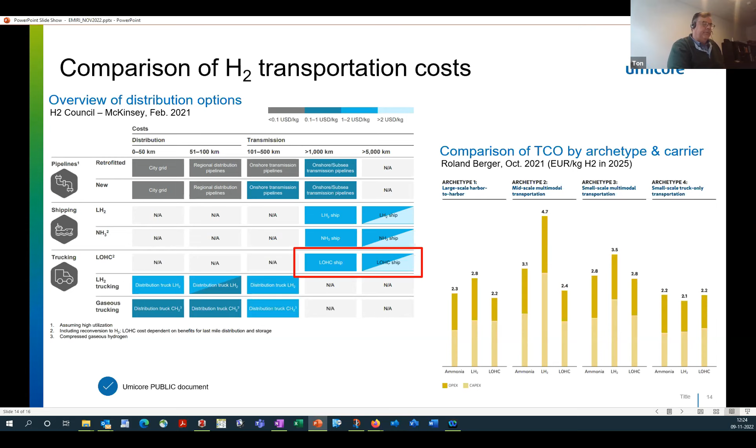If you look at the cost of these kinds of operation, in the graph to the right we see a comparison of the cost of ammonia, liquefied hydrogen, and LOHC. We have seen a similar one. So the cost of this operation is very comparable to that of ammonia, but it's clearly cheaper than handling of liquid hydrogen.

So in conclusion, I say that LOHC has a useful hydrogen storage capacity, 4 to 5% is very reasonable. We reach an energy density that is somewhat lower, or a bit lower, than in current fossil fuels, but it's useful. With LOHC, you can have an effective and safe transport of hydrogen. And another positive point is that all required materials, catalysts, are actually known today. So we basically can put it together today. All process steps are known.

And last but not least, the LOHC compounds - these are in principle oils that are used in heat exchangers today. They are widely available today already on a commercial scale.

Then a little bit to the lesser points. The technology will require quite a bit of logistics. We have to figure out how you return the used oil back to the hydrogenation plant. And if you put it on a vehicle or on a ship, you have to think about the tank system, because you have to retain the used oil in one way or another. About cost, it seems cost competitive. And the last point is that engineering of the heat management is a challenge for this technology. It is very much like the points for ammonia and solid hydrogen storage materials.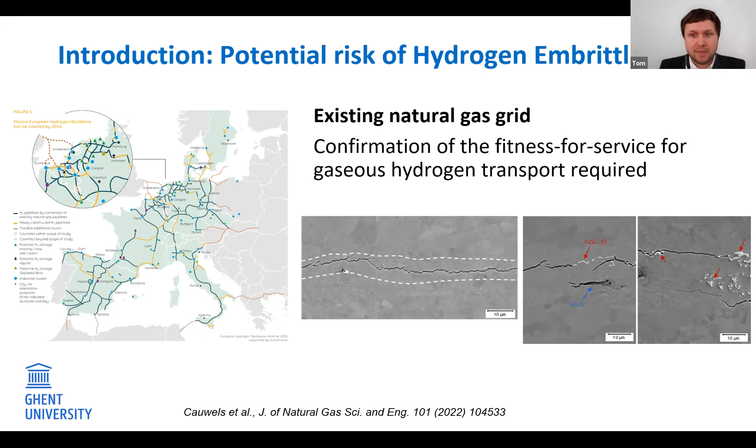For instance, in this picture you can see an X70 pipeline steel where cracks were initiated in the hard segregation bands showing MnS inclusions and niobium-based carbonitrides.

This is the content of my presentation. I will start generally on hydrogen embrittlement of pipeline steels, and then we will talk a bit more about different influences.

We have two different types of testing. We have quasi-static testing, where the quasi-static load refers to a load which is constant in time or changes very slowly. Quasi-static loads in pipeline steels originate from gas pressure of the transported gas or internal residual stresses in the material. Cyclic loading then is more associated with fluctuations in the gas pressure and applied loads on the pipeline structure when used to transport or store pressurized hydrogen gas.

The resistance of a material against quasi-static load is described by its mechanical properties, for instance tensile properties, yield strength, tensile strength, ductility, and also fracture resistance properties like fracture toughness. The ductility of pipeline steel, typically expressed in terms of reduction of area at fracture or elongation to fracture, is significantly reduced in the presence of hydrogen.

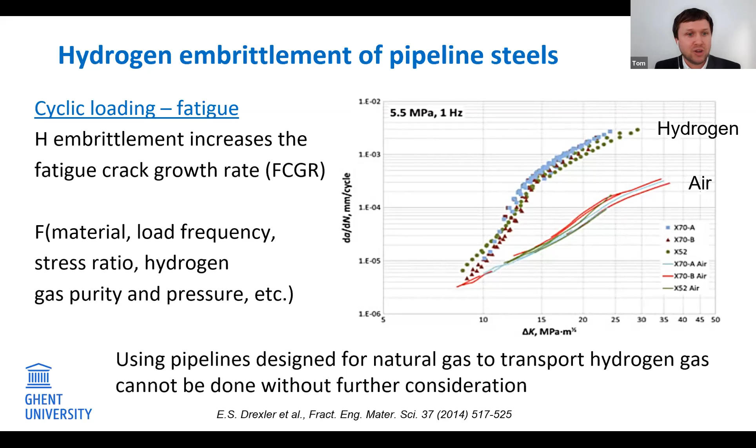Well, using pipelines designed for natural gas, which are used nowadays in the existing grid, to transport hydrogen gas in the future cannot be done without further consideration.

The pipeline lifetime can be estimated conservatively by using the upper bound of the fatigue crack growth rate database, gathered from experiments using different pipeline steel grades and loading conditions. This method is proposed in a recent modification of the ASME code B31.12, concerning the fatigue lifetime of pipelines transporting gaseous hydrogen.

Let's talk about different influences. First one is the frequency. Studies indicate a negative correlation between frequency and the fatigue crack growth rate in gaseous hydrogen atmosphere.

Hydrogen embrittlement is time dependent, as hydrogen needs to absorb into the steel microstructure and diffuse to the crack tip to deteriorate the material. Lowering the loading cycle frequency extends the exposure time of the material to the hydrogen gas environment, so more hydrogen atoms are able to absorb into the steel microstructure and diffuse over longer distances to the crack tip region with each loading cycle.

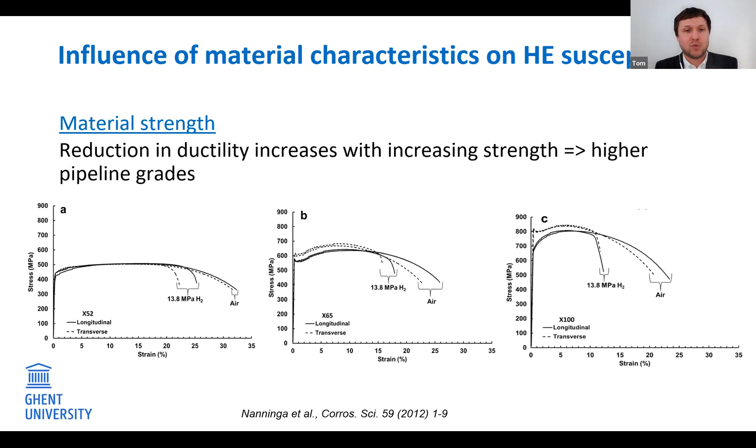However, when going through the literature, this is somewhat contradictory. Generally, the literature fails to confirm a correlation between strength and hydrogen-assisted fatigue crack growth for pipeline steels. It's not the strength and hardness that is the key factor, it's more the microstructure and chemistry that dominate the fatigue crack growth behavior in gaseous hydrogen atmosphere. It is therefore not correct that any increase in strength, by definition, leads to inferior hydrogen resistance.

Steels of similar strengths are often fabricated following different heat treatment schedules, and because of this they show a different microstructure, which leads to different behavior in the hydrogen atmosphere. Therefore, we now have a necessary conservatism in the fitness for service assessment of the existing network.

The diffusion is important, and this is linked to the microstructure. Each microstructural component, phase, and microstructure shows a different behavior when exposed to hydrogen. Absorbed hydrogen atoms can diffuse in the steel, and they can get trapped.

They can get trapped in a reversible or irreversible manner at trapping sites, at defects in the microstructure. For instance, grain boundaries, dislocations, or other metallurgical defects such as non-metallic inclusions, precipitates, regions of hard microstructure, or segregation lines.

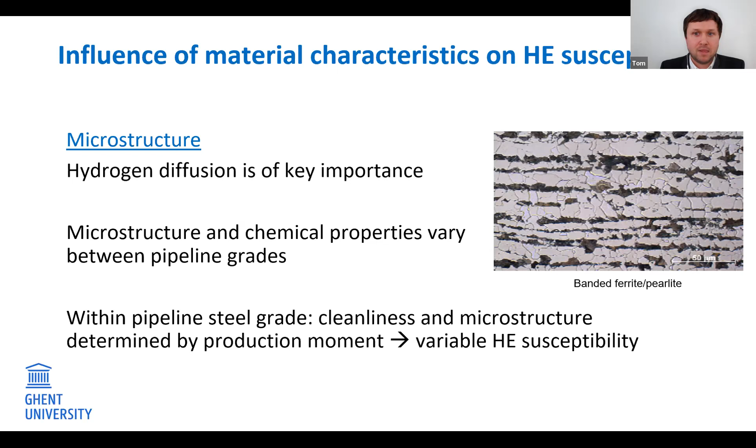The existing pipeline system is constructed out of an enormous variety of materials over the years. Different types of pipeline steel grades, produced following different production processes, are implemented into the grid. The complexity of making a general assessment of the resistance to hydrogen embrittlement is very difficult, and it's clear by this.

A proper evaluation of the sensitivity to hydrogen degradation of the current pipeline system requires understanding of the relation between microstructure and hydrogen-assisted degradation. As you can see here, we see a vintage X56 and a contemporary X70 steel. These materials show a heterogeneous microstructure; you can see bands being present.

They show different trapping characteristics, different diffusion characteristics, and they lead to a different sensitivity to hydrogen embrittlement. In the case of charging very severely, which is happening in cathodic overprotection, you can see that the X56 material shows a lot of cracking present. Most of these cracks are hydrogen-induced cracks, because this is without mechanical load. We talk about hydrogen-assisted cracking when it's combined with mechanical loading. In this case, it's hydrogen-induced cracking because there is no mechanical load - only exposure to the hydrogen atmosphere already leads to cracking without any additional mechanical loading.

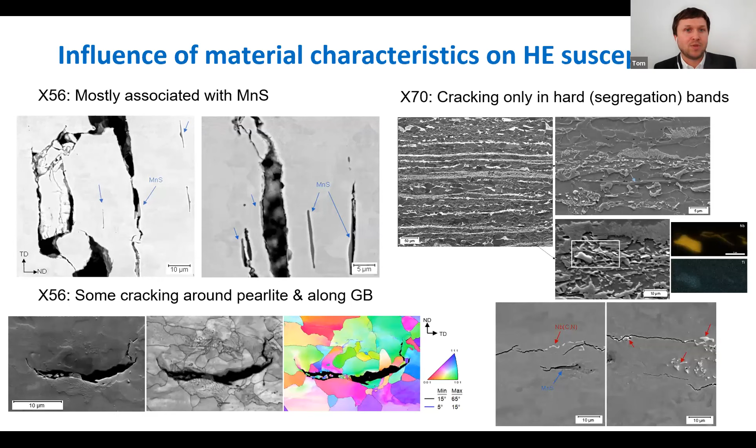Here you can see cracks starting at manganese sulfide inclusions, also at pearlite or along grain boundaries for the X56. This X56 material was much more prone, much more sensitive to this hydrogen-induced cracking formation, although the strength level was lower compared to the X70 material. For the X70, we needed to charge much more hydrogen into that material to observe some cracking, again observed at manganese sulfide inclusions or niobium-based carbonitrides and the segregation hard bands of the material.

Let's consider welds now, because welds are also an important factor in the distribution of gaseous hydrogen. Pipeline welds show critical features compared to the base material. For instance, stress concentrations are present due to geometrical imperfections. We also have weld flaws, and we can also have poor coating conditions. Next to that, we have critical microstructures present in a weld because we have different types of microstructures going from the filler to the base material, with heat affected zones in between. Also, we have high residual stress. Welds in pipelines are typically the region in which most defects can be found.

We know already that defects can interact with hydrogen because they can trap hydrogen and affect diffusivity. So these are critical regions, and they can be more sensitive to fatigue crack initiation. However, there is no extensive literature done yet on gaseous hydrogen, and many inconsistencies exist in the literature.

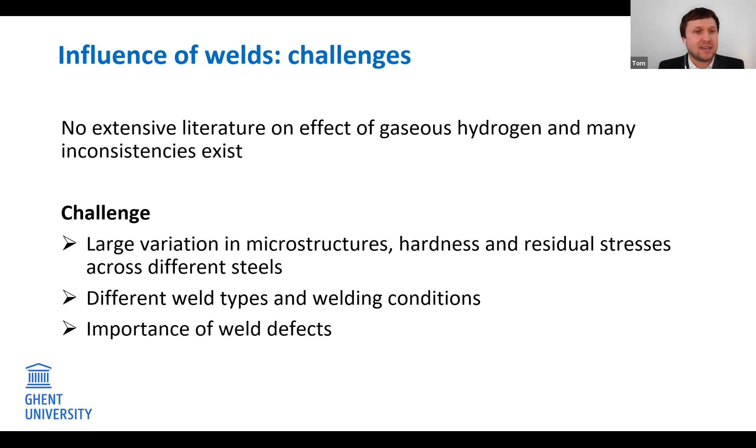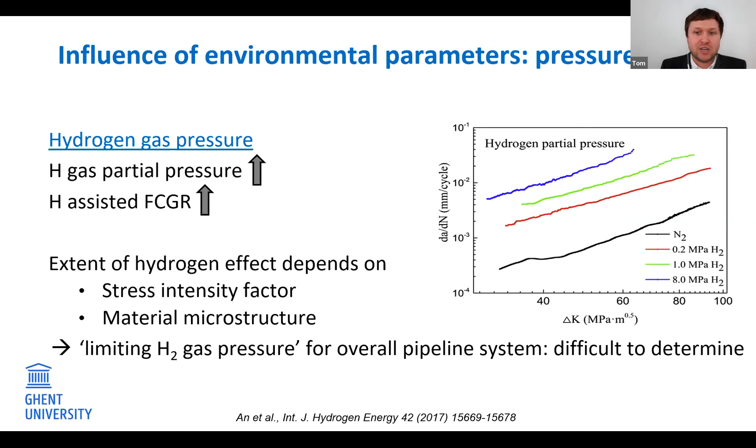The second parameter is temperature. Carbon and low alloy steels exhibit less severe hydrogen embrittlement as temperature increases. The fatigue crack growth rate was found to be maximum at room temperature. The influence of temperature can be explained based on the hydrogen trapping model, in which hydrogen is considered to diffuse through the material or be trapped with a certain binding energy at these microstructural defects and constituents. At temperatures lower than room temperature, the diffusivity of hydrogen is too slow, too sluggish, to substantially accumulate at traps. At high temperatures, hydrogen mobility is strongly enhanced and trapping is diminished, and detrapping is also facilitated. For instance, for underground pipelines operating between 0 and 10 degrees, room temperature experiments can give conservative results.

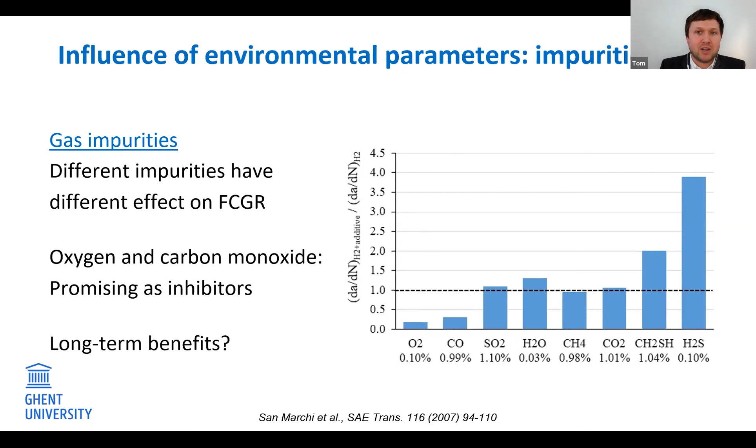Let's go to the conclusions. The exact influence is affected by many parameters, as I explained in my presentation today. For instance, the material chemical composition and the microstructure are very key. Also, the load frequency, the hydrogen gas pressure, and the gas purity play an important role.

A method to conservatively estimate the lifetime of a pipeline system is to use an upper bound of the fatigue crack growth rate data gathered from experiments, using different pipeline steel grades and loading conditions. This method is proposed in a new modification of the ASME B31.12 code concerning the fatigue lifetime of pipelines transporting gaseous hydrogen. A lot of studies state that the susceptibility to hydrogen embrittlement increases as the material strength increases. However, other authors conclude that the fatigue crack growth response in a hydrogen environment is determined by the pipeline steel and its specific microstructure, rather than its strength grade.

Moreover, over the years, different types of pipeline steel grades, produced following different production processes, were implemented in the network as well. Attention should also be given to the welded connections, given their variety of microstructures. The potential presence of weld flaws and the presence of stress contributions is very important here.